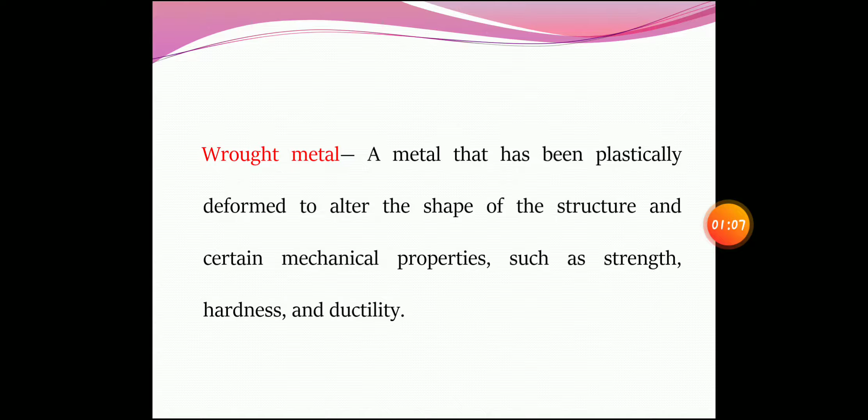Now coming to how it is manufactured, it is as simple as that. In the definition, a cast metal, as we said, will be plastically deformed. But how do we do it? We do it by subjecting it to heat treatment, that is intermediate heat treatment, and passing it through a series of dies. A die is nothing but a replica. Like if you want an orthodontic wire to be constructed, which is a wrought wire, you will pass it through a die which resembles the orthodontic wire shape. So that is what is done. A cast alloy is passed through a series of dies through intermediate heat treatment.

What are these heat treatments? This is nothing similar to what we observe in our daily life, like glass making. What they'll do is heat it to a higher temperature where the glass becomes very moldable. When it is moldable and shaped into a desired form using some instruments or pliers, they suddenly quench it in water so that particular shape is fixed.

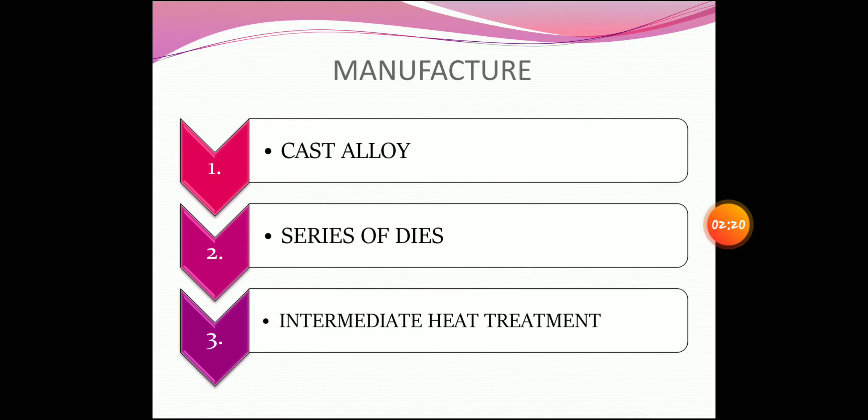So this is how wrought metal alloys are also manufactured. This cast alloy undergoes a series of dies treatment through intermediate heat treatment, and then we get the wrought form of the alloy. Now coming to the uses of wrought metals, it is used in orthodontic wires because it requires some flexibility and ductility for the movement of teeth, orthodontic brackets and endodontic files.

Why in endodontic files? Because the curved canals, the root canals which we find in our teeth, are not straight, they are curved. So you require some amount of flexibility and ductility. So in order to incorporate certain properties, as we have already known from the definition, we use this wrought metal alloy. That is why it is used in endodontic files.

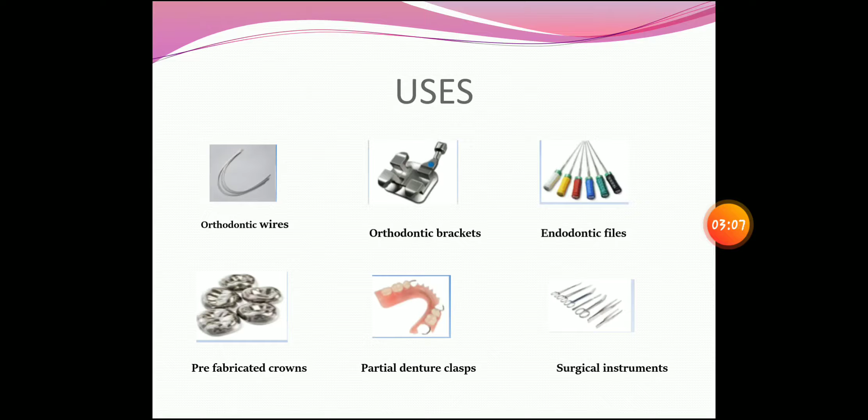Prefabricated crowns, where we can manipulate the crown, not like a casted crown, and partial denture clasps, where the patient can put in and take out the clasp, and certain surgical instruments.

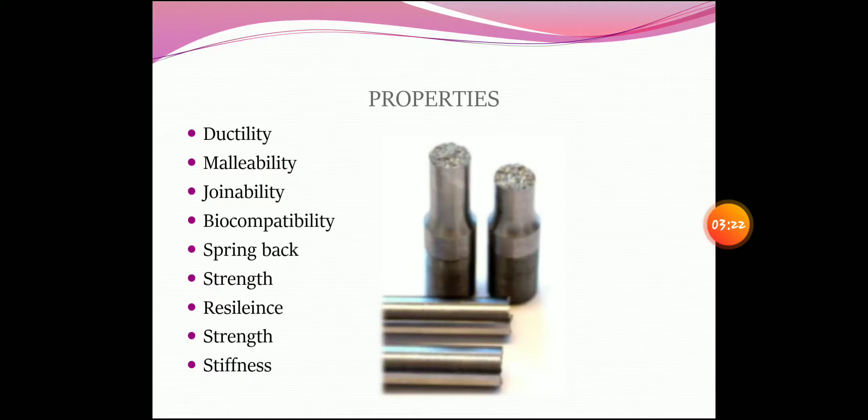Okay, now coming to certain properties of wrought metal alloys. One is ductility. Ductility is the ability of the metal to be drawn into wires, like orthodontic wires, that property is ductility. Malleability is the ability of a material to be drawn into thin sheets, like gold foil.

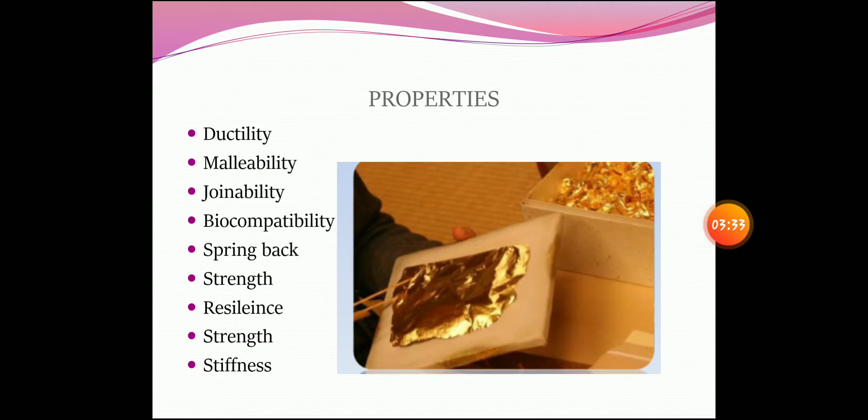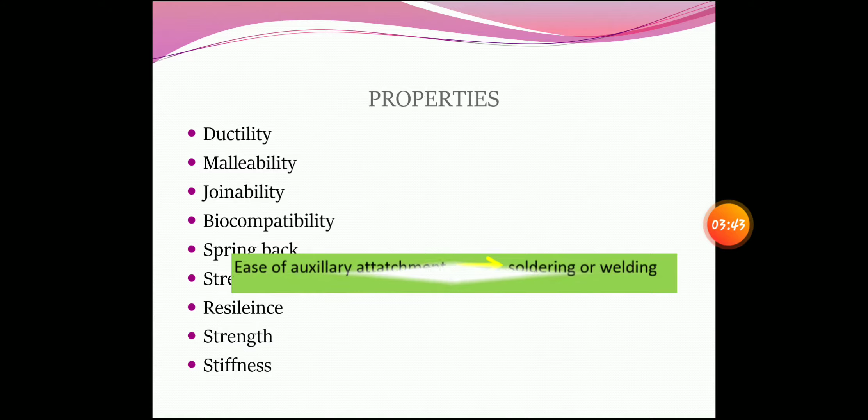And what is biocompatibility in a metal? Biocompatibility is the resistance to corrosion. And what is joinability? Joinability is something that allows us to fix two metals together either by soldering or welding, that is, ease of auxiliary attachment.

Now coming to the rest of the properties, which are the complete mechanical properties of a wrought metal alloy. It is similar to the general mechanical properties we deal with, so we'll go through the stress strain curve. We'll just brush up on the basics now, coming to this stress strain curve.

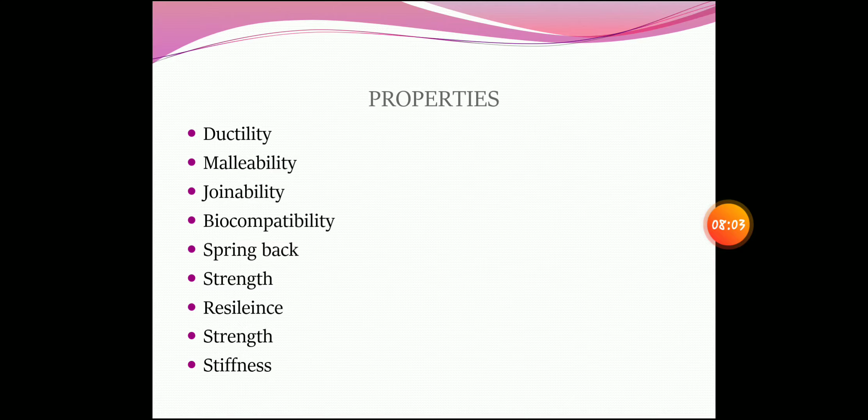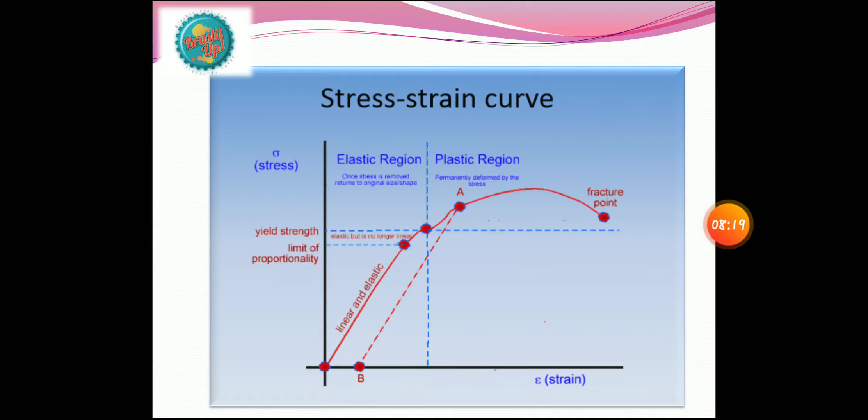Now it's understood, right? Now coming to the deformation of metals, usually in wrought metal alloys, the crystallization doesn't start at a point and end there, so it is not occurring plane to plane. Indeed, it is occurring in a random and imperfect manner, because of which there will be certain kinds of defects present, called crystal imperfections.

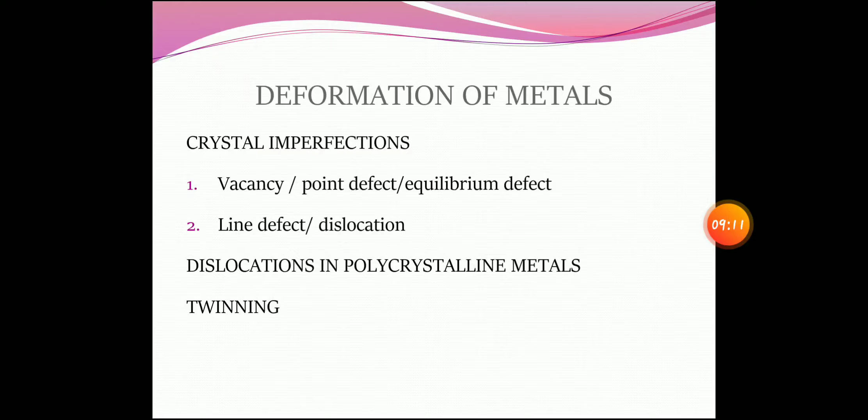It can be a vacancy or point defect, also called an equilibrium state defect, and the other is a line defect or dislocation. There are also dislocations occurring in polycrystalline metals, not a single crystal but polycrystalline, meaning it will have a solute, a matrix, different crystal structure, different atoms. And also another point of twinning.

Now what is a point defect? A point defect is one in which the lattice positions will have either missing atoms, displaced atoms, or extra atoms. For example, consider point A where there is a missing atom, that is vacancy. If it is B, there is also a missing atom. Whereas C, there is an extra atom which is occupying the interstitial spaces of the others, causing the other molecules to get displaced. That is called an interstitial atom.

And again, this vacancy can be two or three, it can be a bivacancy or trivacancy. Why is it called an equilibrium state defect? Because these defects occur at room temperature. There is no rise in temperature at the point of the defect, so this is called an equilibrium state defect.

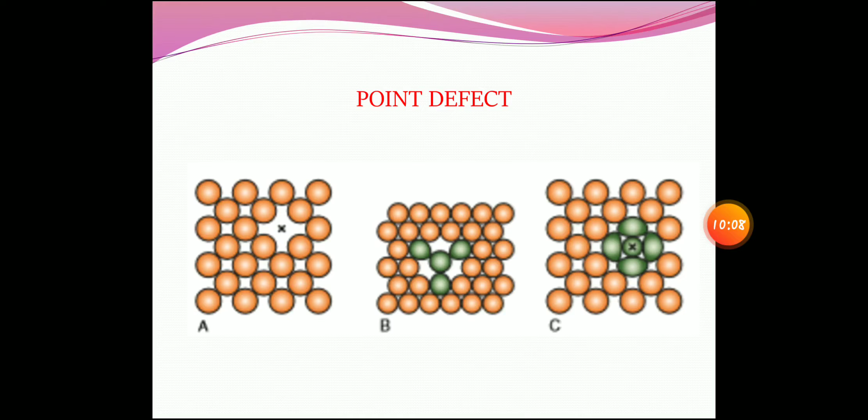Now coming to line defect. What is a line defect? It is a single vertical plane of defect where one plane is in defect, that is called a line defect, and it is represented by the symbol reverse T.

Now coming to when a shear stress is applied for a cube or the crystal which is having a line defect, there is a transfer of defect from one plane to another plane, and the direction in which it is transferred according to the force applied is the slip direction, and the plane it is moving on is called the slip plane.

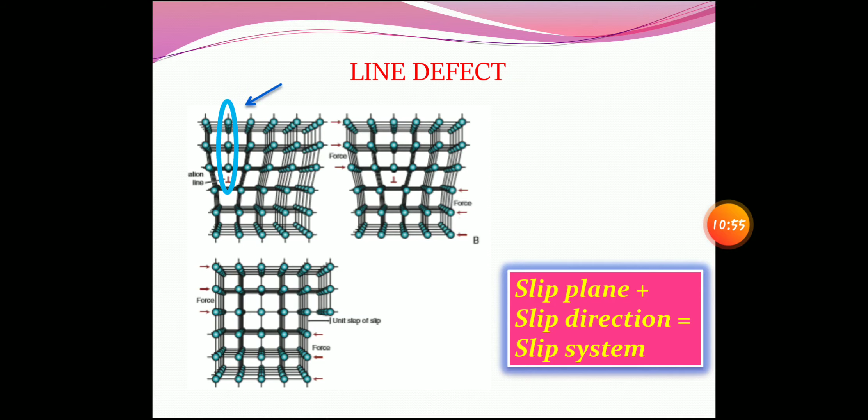See the light blue colored thing which is rounded, that is the line defect, and the direction is represented by the force, that is the slip direction. The entire system, that is slip plane plus slip direction, is called the slip system.

So now exactly why is this defect useful? Because these defects usually bring about the plasticity of a material. If there are more number of slip systems, it means there is more plasticity. So when comparing a lattice, the face centered cubic will have more ductility because of more number of slip systems compared to body centered cubic and hexagonal closely packed.

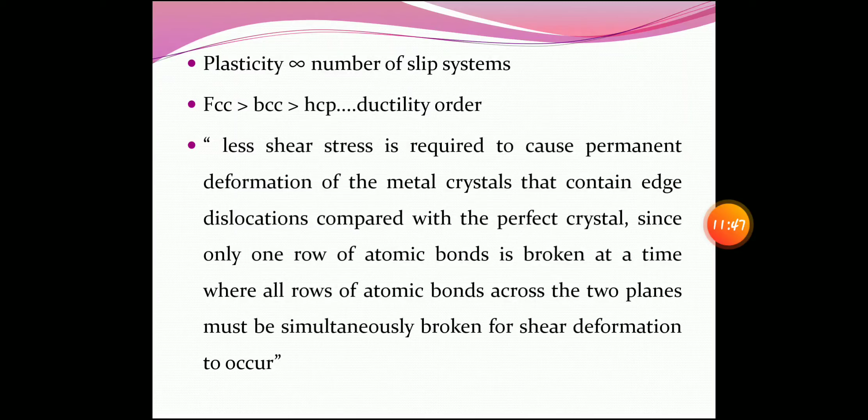Now coming to shear stress: if you consider a perfect crystal and a crystal with dislocations or defects like line or point defect, less shear stress is required to cause the permanent deformation of metal crystals that contain edge dislocations compared with perfect crystals. You know why? Because it is only one row of atomic bonds that have to be broken, but here you have to break the entire plane.

Now, alloys which contain multiple phases, like polycrystalline metals or some solid state solutions or precipitates, will have some solute atoms within, like a different atom of the same crystal. So what they'll do is impede this slip plane which is moving. This slip plane can be impeded by coherent or incoherent solute atoms. The coherent ones are something similar to B, where this coherent precipitate will cause some dislocation or distortion in the slip plane as already shown, whereas the incoherent ones form loops around the solute crystals.

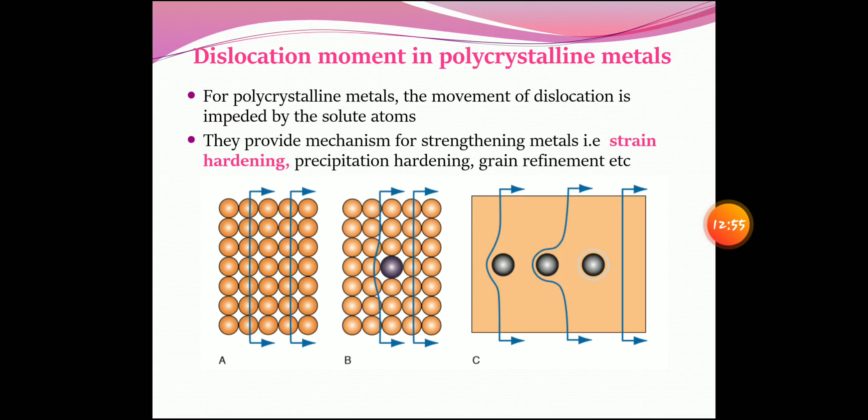So what is this required for? This is because it provides a strengthening mechanism for the metals because of the presence of solute atoms. That is why we add more grain structures into the alloys to increase the strength of the alloy, to prevent easy ductility of the alloy. This is the basis for strain hardening, precipitation hardening, and grain refinement. So what happens because of strain hardening is that there will be an increase in the proportional limit, hardness, and yield strength of the material, whereas the ductility and corrosion resistance are decreased.

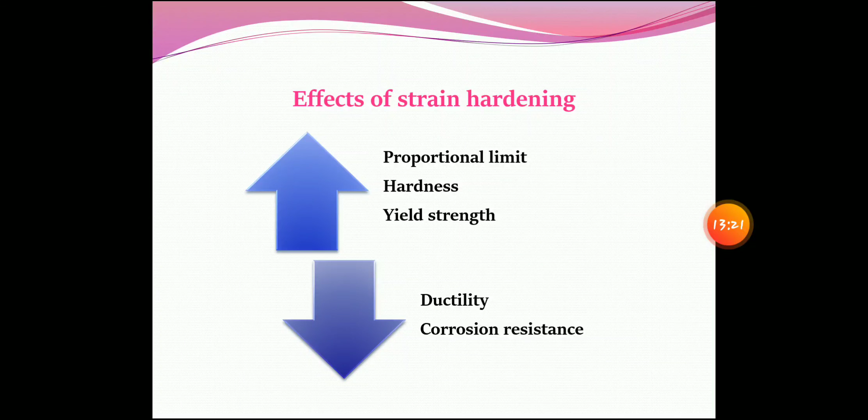So the properties we desire to have in wrought metal alloys have been incorporated because of the effects of strain hardening, that is, before manufacturing or using the alloy.